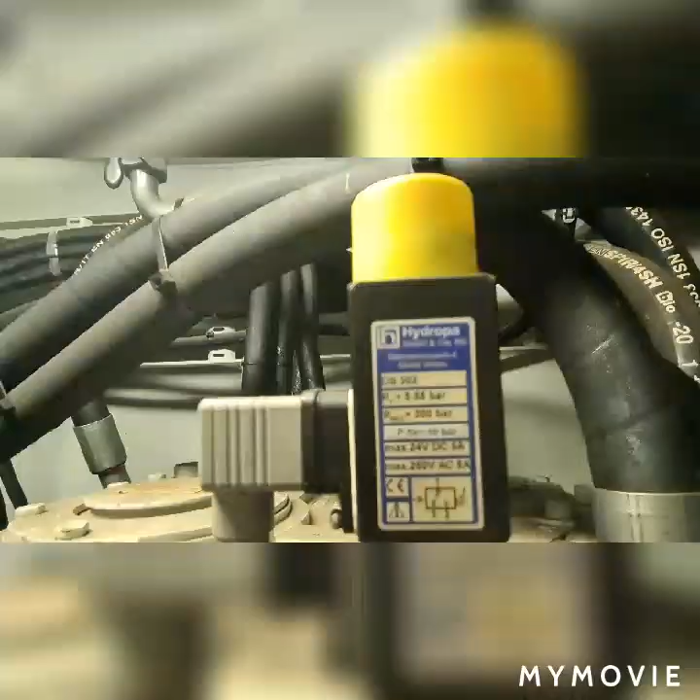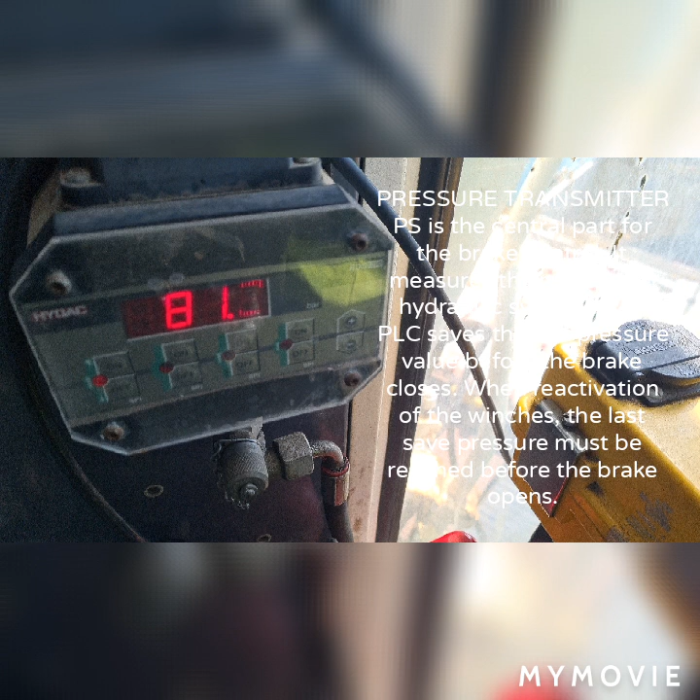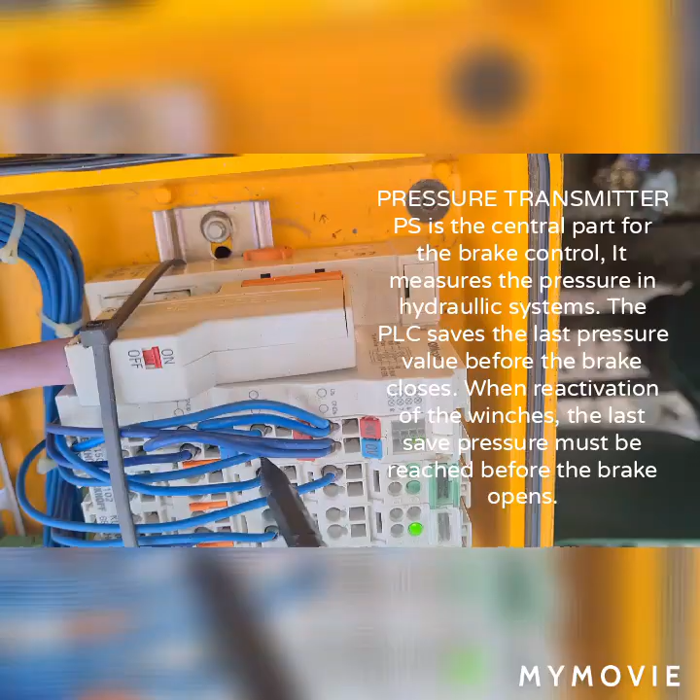Before doing any troubleshooting on crane failure, you need to familiarize yourself with the functionality of each component and part. We have the pressure transmitters, the central part of the brake control that measures the pressure of your hydraulic system. The PLC saves the last pressure value before the brake closes. When activating the winches, the last saved pressure must be reached before the brake opens again. So once the brake is closed, you cannot operate the crane at all.

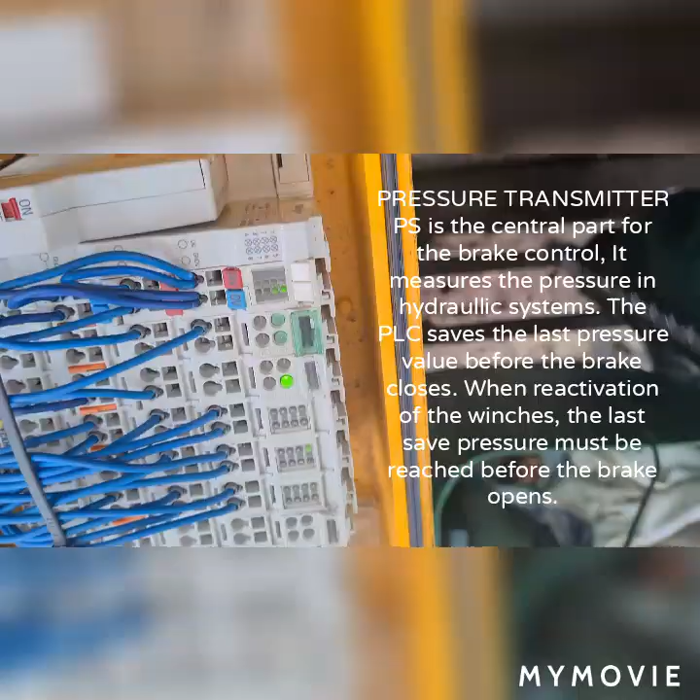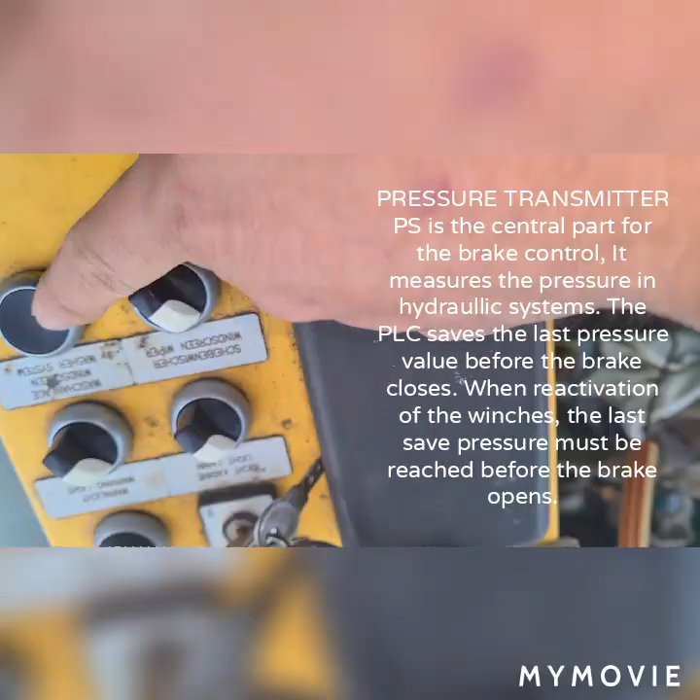To check, first I open this control lever with a joystick and check all the connections inside, tighten it, and do a certain check on it. As per check, the sound is activated and the overspeed lamp is activated. Once activated, the brake closes and you cannot run the crane at all.

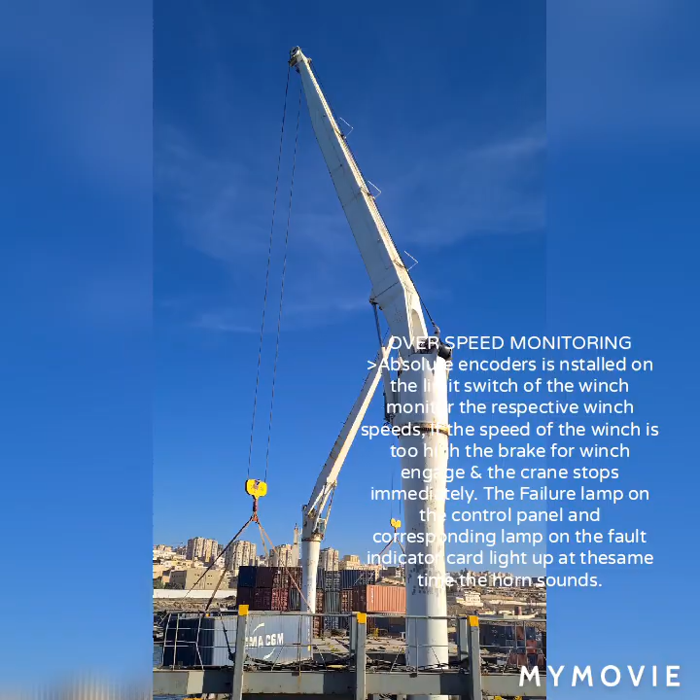You must take note that on top of the crane house there are rotary encoders installed and coupled on the hoisting winches. These rotary encoders continuously monitor the speed of your winches. Once the winches rotate and the PLC does not receive any signal from the encoders, a failure is triggered on the display with fault encoder number 14.

Take note, once this fault happens frequently, you need to check and inspect the encoders on top of your crane housing and do a replacement if necessary.

But before doing a replacement, you need to perform a proper calibration by zeroing the encoder's position. To do the calibration, put the jib at boom rest, then lower the hook by 1.5 meters, and inside the cabinet position the turnkey switch preset into the one position, then press the button preset hoisting gear for 2 seconds. After doing that, the zero-point calibration is accomplished.

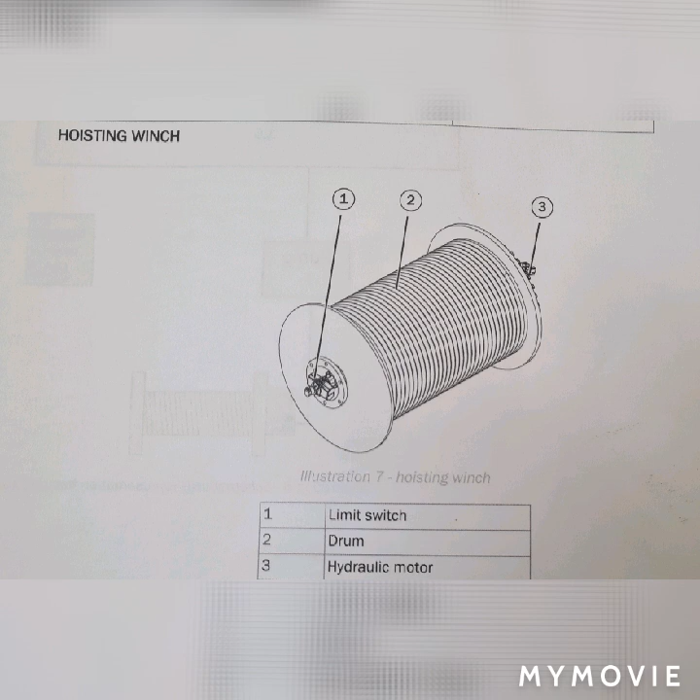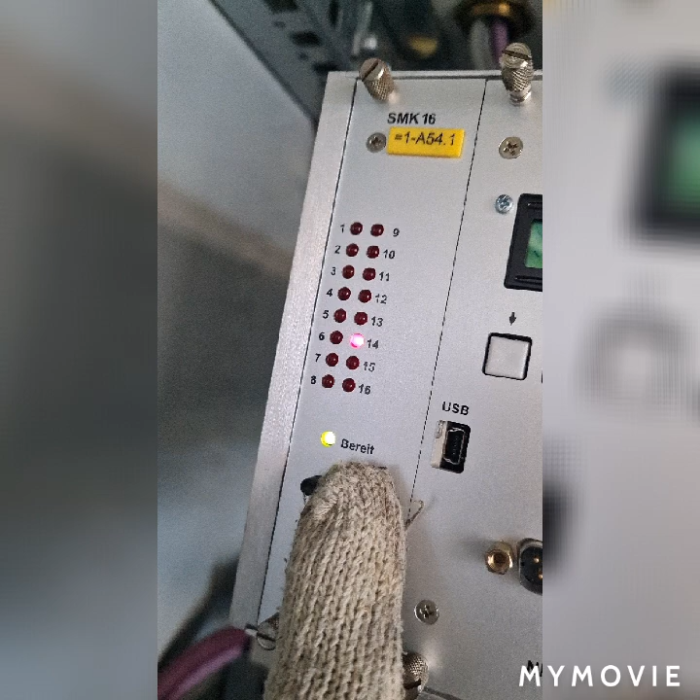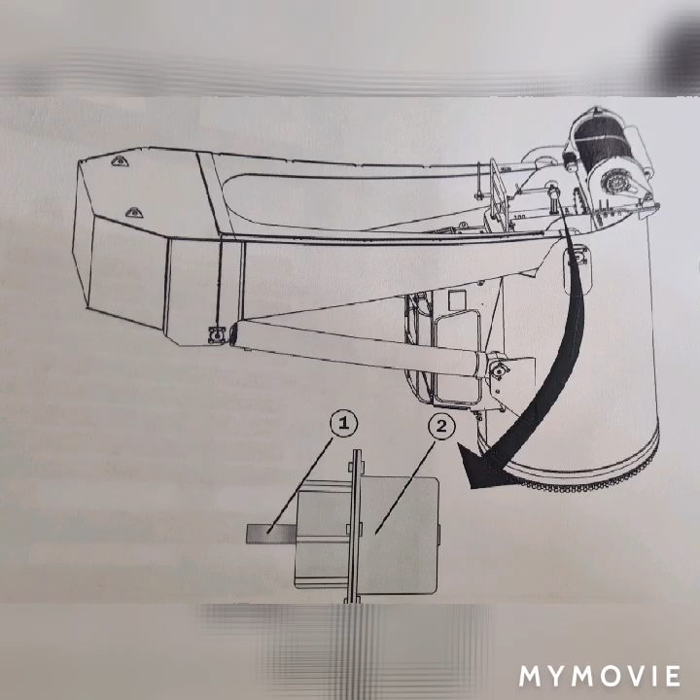So this is our drum winch from which the hoisting hook is installed together with the encoders, and this is the block, the ropes and the drum assembly. From there you will find that there is number 14 fault, meaning encoder faults, and there is a hoisting gear assembly with oil tank, pump unit and pumps. We have also a jib luffing limit switches which was installed with a lever, and there is also a slewing gear assembly with oil tank, pump unit.

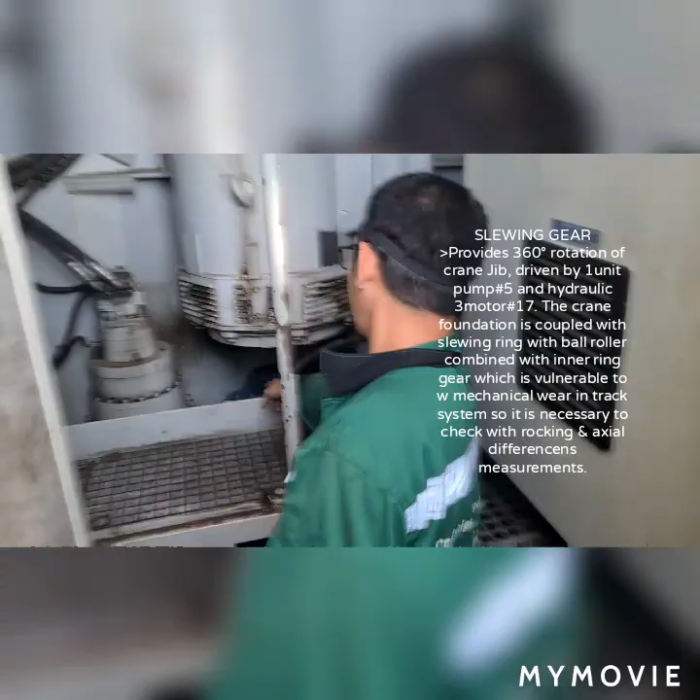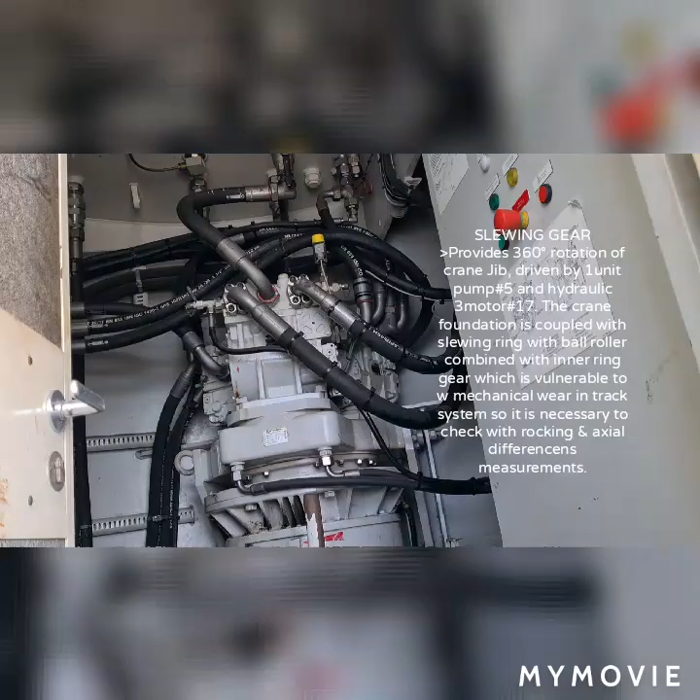Together with me is my chief engineer. Take note that the slewing gear is having a rotation of 360 degrees, meaning the jib will be able to rotate by 360 degrees, and this is installed with a bearing which was very vulnerable to mechanical wear, so you must need to do a check with a rocking test and axial difference measurement on it.

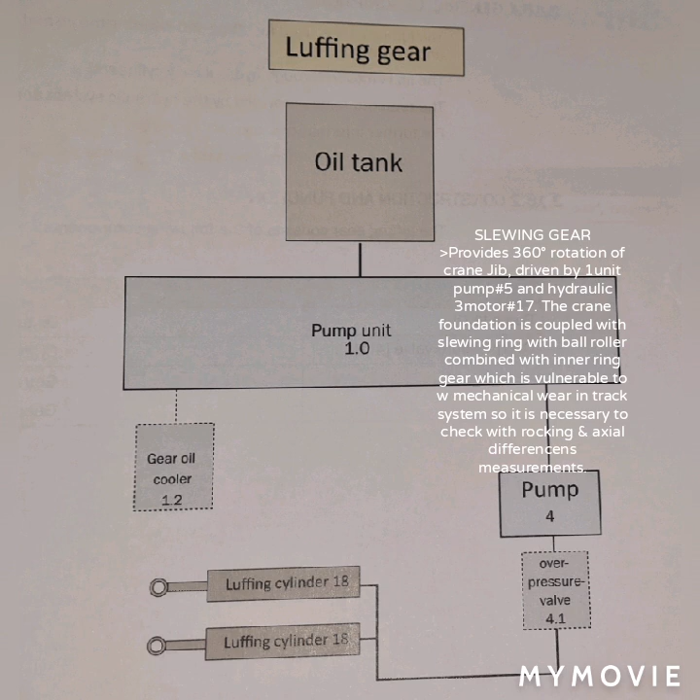Luffing gear is controlled and actuated by the 2 cylinders. Binibilan na natin yung hatch cover ng crane. Ayan guys.

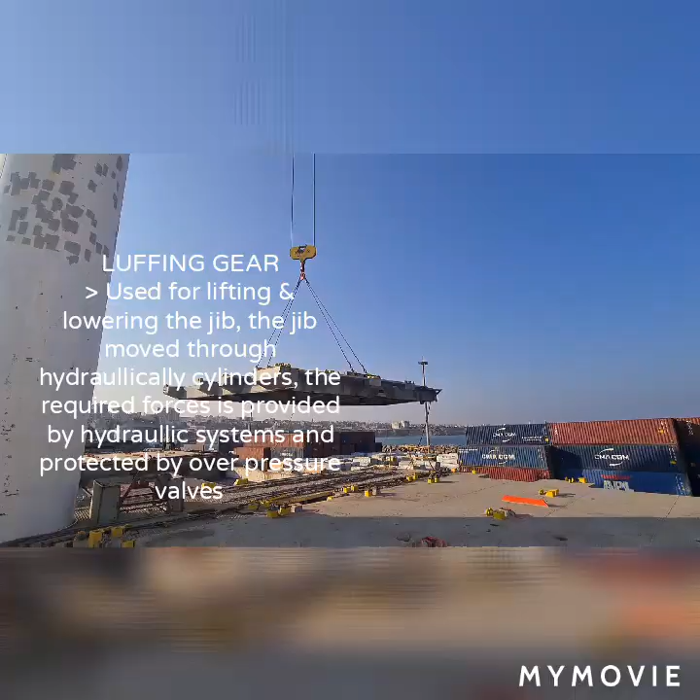Yan tayo, yan na, malapit na dito guys. Opposite direction tayo, tayo sa safe side. Doon o, yun o.

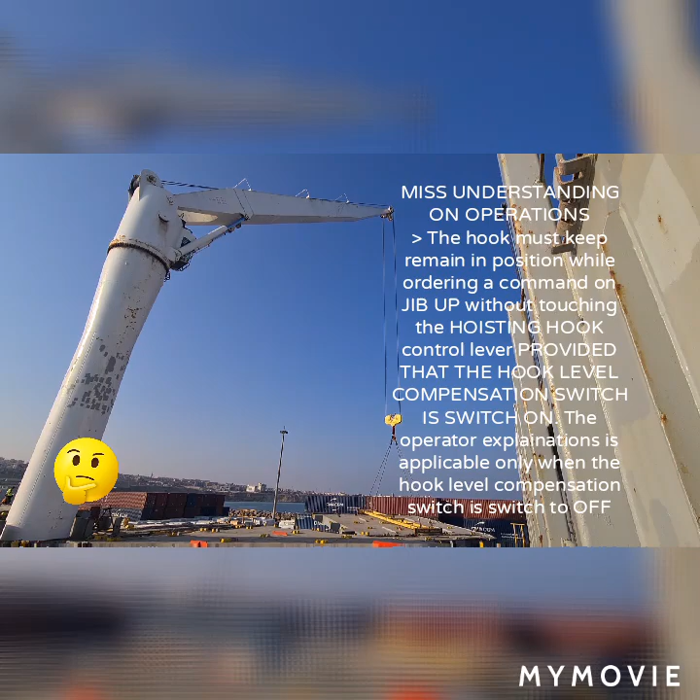Yan ang nangyayari sa kanya. Nagsuswing siya ngayon, swing. Then nakafix yung boom, nakafix din yung runner, yung hoisting down at saka hoisting up. Ngayon, ang tinatanong niya, bakit daw sumasabay ang runner sa pag-boom down at pag-boom up? So yan, binababa na niya yung runner, sumasabay din yung boom. Ayan ngayon, ibu-boom up ko yung jib, itataas ko. Dapat, yung hook na yan sasabayan sa pagtaas, hindi siya mag-o-auto slack.

Okay, sige, obserbahan ko rito. Yun, kaibigan ko, yung aming chief. Kaway-kaway! Yun, ino-obserbahan natin yung crane, paano siya gumana.

Ang ginagawa mo ngayon, binoboom down mo? Boom up yan, boom up. Kung ano, sasabay lang yung hook pataas, hindi siya mag-o-auto slack. Oo, si Boss. Bali, binoboom up mo yan, tapos yung hook nag-i-slack, ganon? Oh, Roger, ganyan ang nangyayari ngayon.

Sa ibang barko, yung mga design ng crane nila, ganyan ang settings. Dito kasi nung dinatnan ko, iba eh. Pag tinaas mo, tataas din yung hook, hindi siya mag-i-slack ng hook.

Ayan, obserbahan mo nga, nag-boom up ka, tapos kung saan nag-i-slack, no? Oh, Roger, eto tapos ito, boom down ko konti ah. Ayun ang problema daw, pag nag-boom down, ayan, boom down ko, tumataas naman siya. Mag-i-boom down na yung ano.

So it is confirmed that the explanation of the crane operators is valid only if the hook level switch is in off position. On this condition, why the hook keep remain on the position while the jib up order command is made, because the switch for the hook level compensation is in on position.

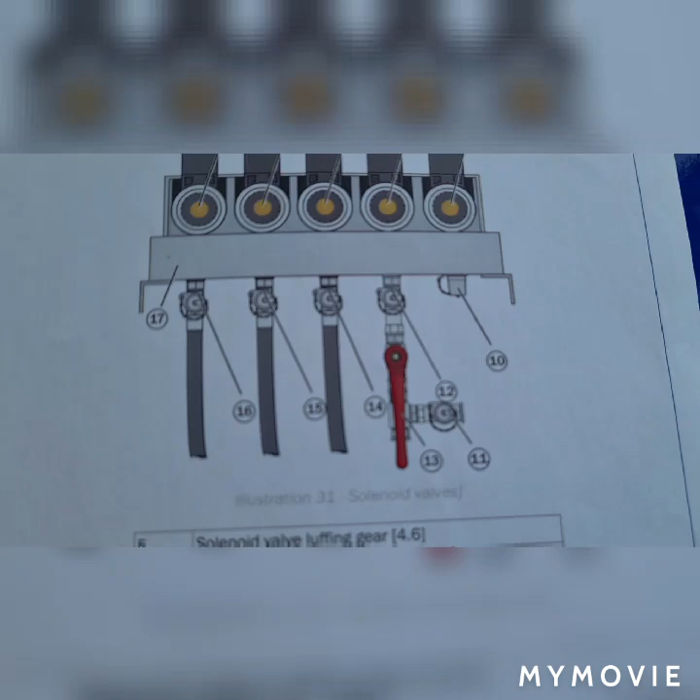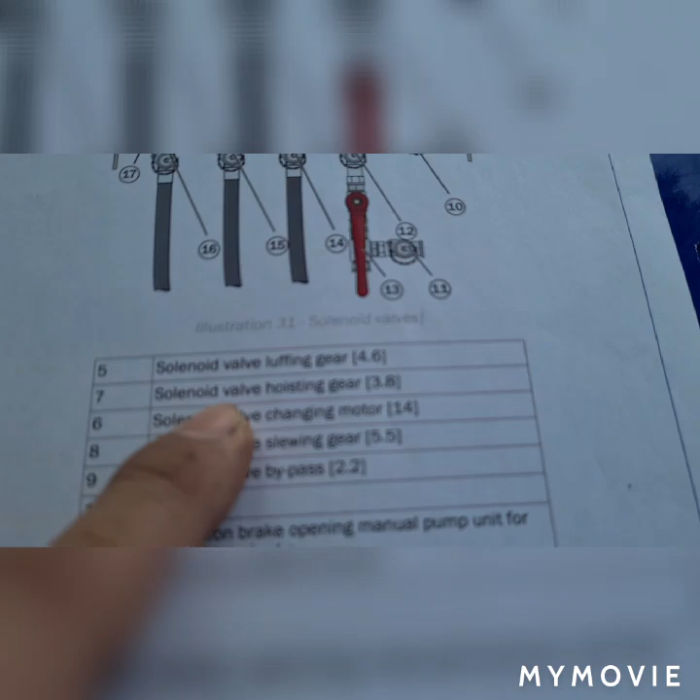So to do a further check, guys, there is a solenoid valve here. This solenoid valve is responsible for the luffing gear, for the hoisting gear, for the changing of the motors, and also solenoid valve for bypass.

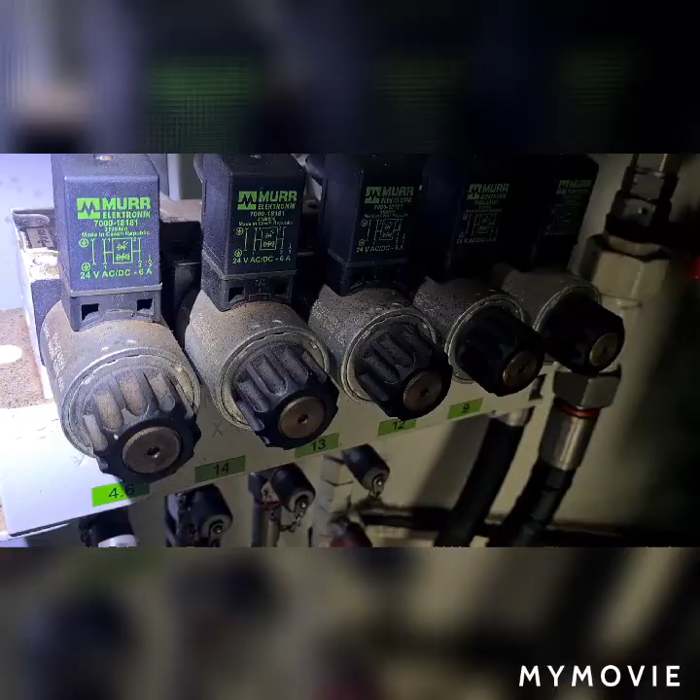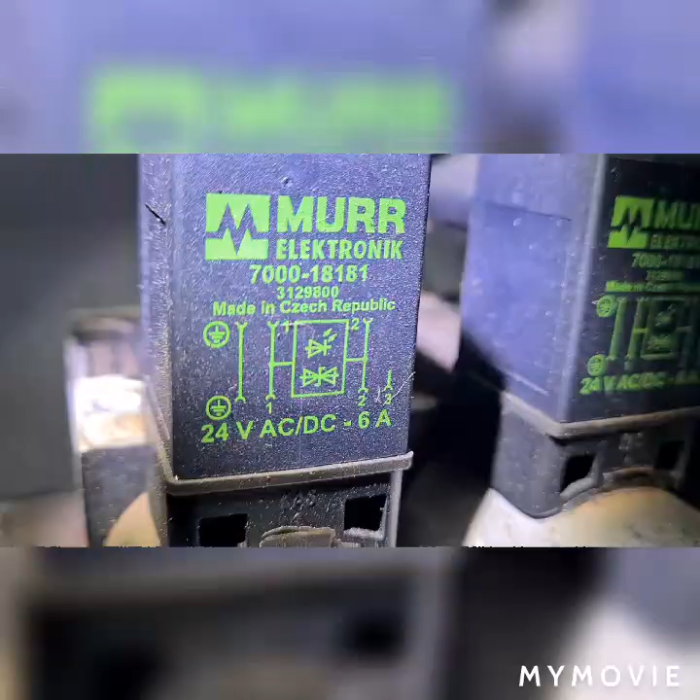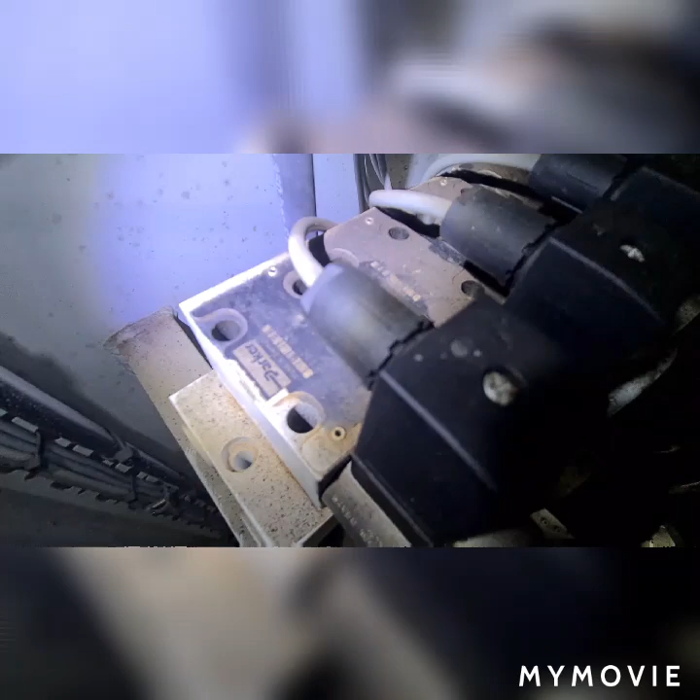So everything that you do order command on the control lever, this lever gives electric power on this solenoid valve. Once this solenoid valve is actuated or energized, it distributes the oil on the motors, hydraulically operated motors, and gives a certain action or execution on every command that you order or want to perform while controlling the operation of the crane.

This solenoid valve also needs to be checked, so any fault or failure of crane operation will be minimized or avoided.

The crane also has a built-in brake unit, stopping brake open after starting function, stopping brake close if the function is closed, if the control lever is in zero position for more than 3 seconds, or immediately after a failure occurs, immediately after the crane is switched off.

So this crane is very safe because it has stopping brakes that will trigger during crane malfunctions, crane overpressures, crane hoisting overspeed. Overspeed is activated with the help of the sensors interfacing in a programmable logic controller.

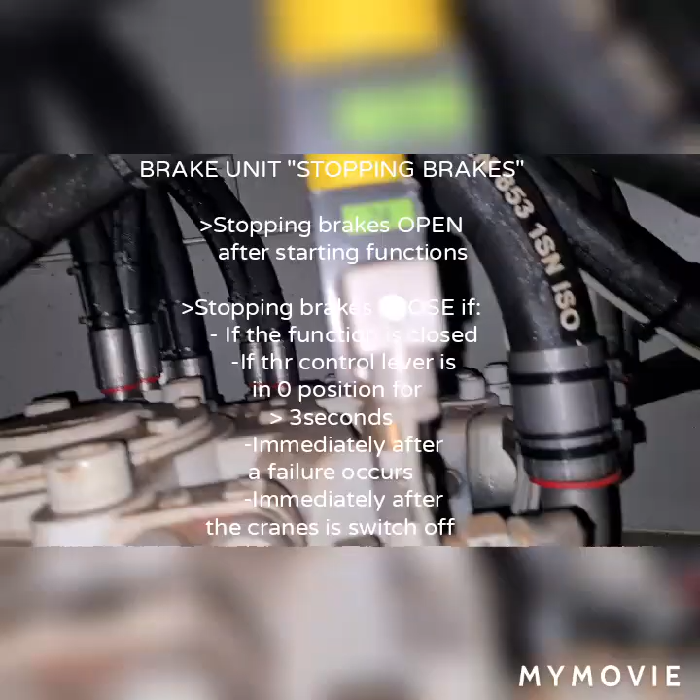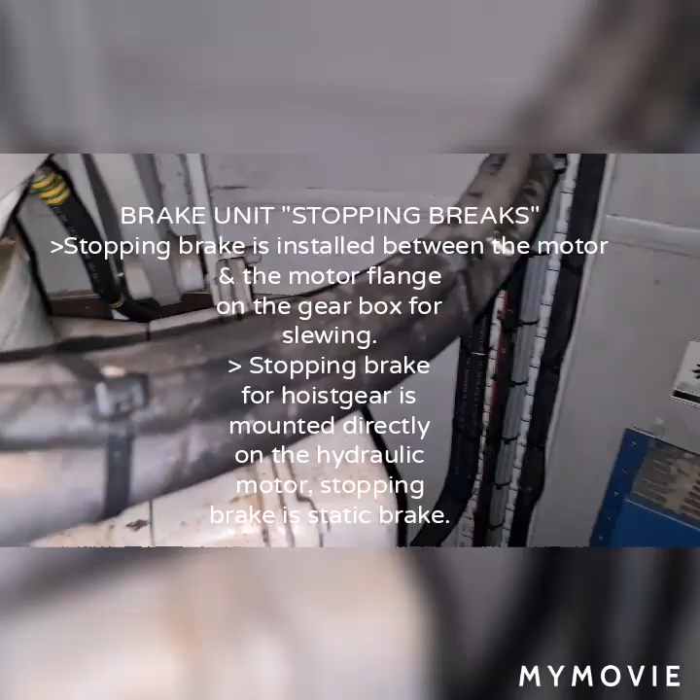As you can see on the main pump, there is a pressure switch that monitors the hoisting pressures that will activate the brakes and stop the crane from moving when there is an overpressure on it or a sudden pressure drop. These are the pressure switches that monitor all hydraulic pressures flowing in my hydraulic hoses.

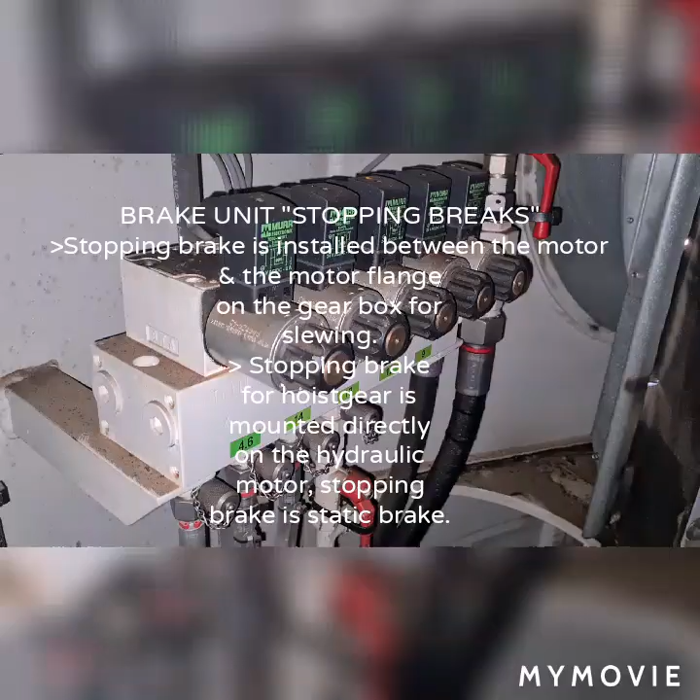So this crane is very safe because it has a safety function that will be able to switch off or cut off the crane operation during a critical situation.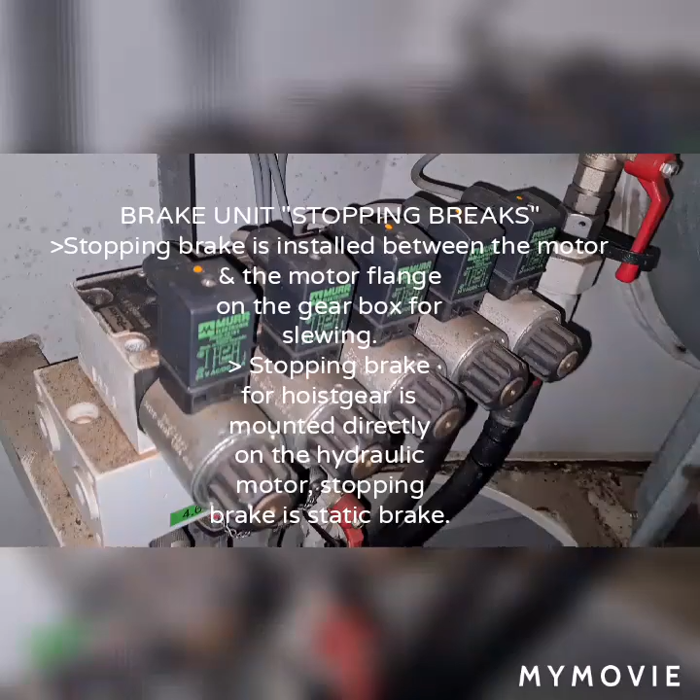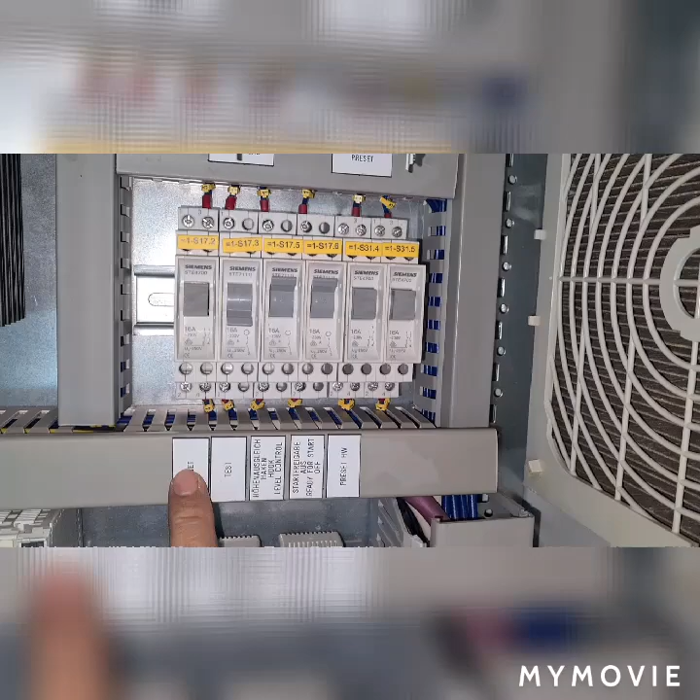And here is the preset key. You must need to position it into 1, and you must need to press also the preset hoisting gear within 2 seconds to perform a zeroing calibration of your encoders. Note, any malfunction on the crane or failure, you must need to press the reset button for you to operate the crane again, provided that you already corrected some failure that you may encounter on it.

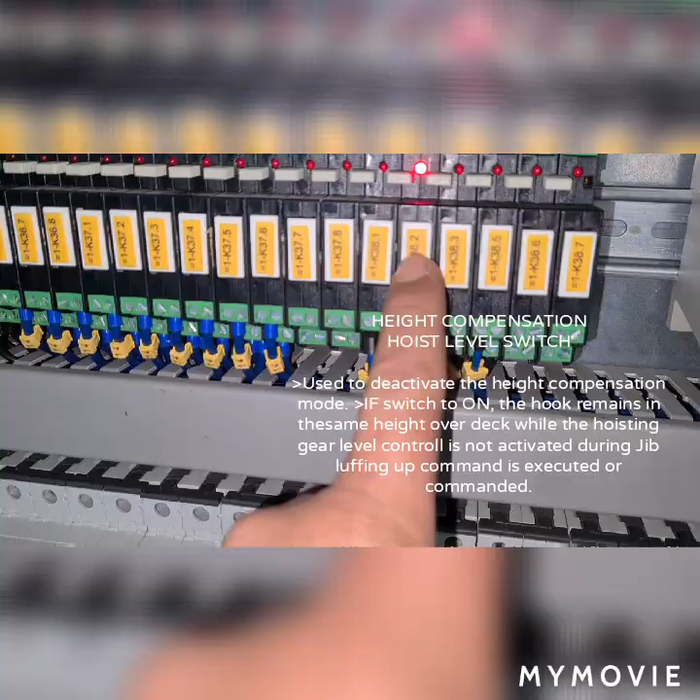Keep in mind that this height compensation switch must need to be switched off if you want to do jib up command without keeping the hook remain on its original position. I asked Bosun to operate the crane and observe the hook responses while doing a jib up order command.

Okay. Hook now. Up, pointing down. Dapat mo nga nandun sa ano? Nandun sa dapat malaki, sa container.

Say, no? Test load, preset. Ngayon, dito, meron tayo rito reset test hook level control. Ready control kapag naka-activate, yun nangyayari. Habang binuboom up, umaarya yung hook kapag naka-on to.

Ngayon, subukan natin itong i-off. Paano rin ni Maestro. Sige, Tro, pasok. Pwede pang i-request, dali ah. May nag-click, ayun, power request. Power request ako, yung power request. Sige, okay, start ko, okay start.

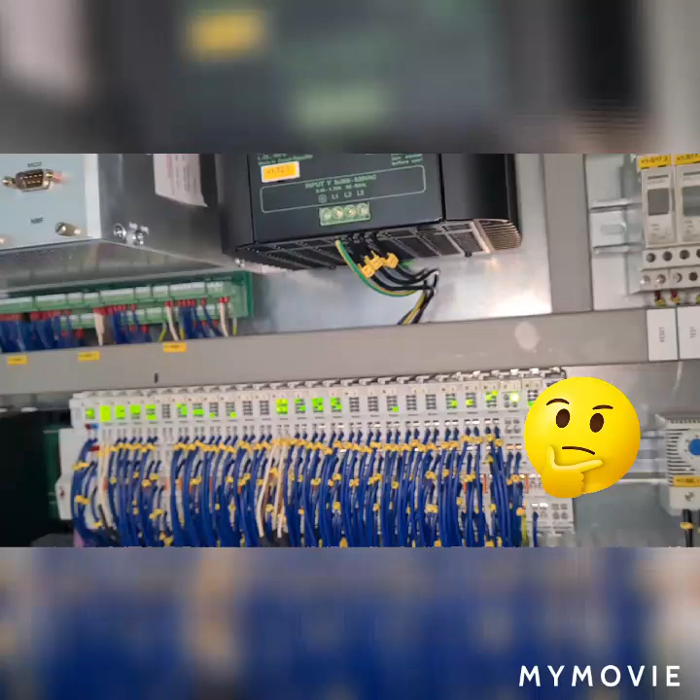Pag nag-boom up, okay. Hook now. Up, pointing down. Dapat mo nga nandun sa ano? Nandun sa dapat mo laki, sa container.

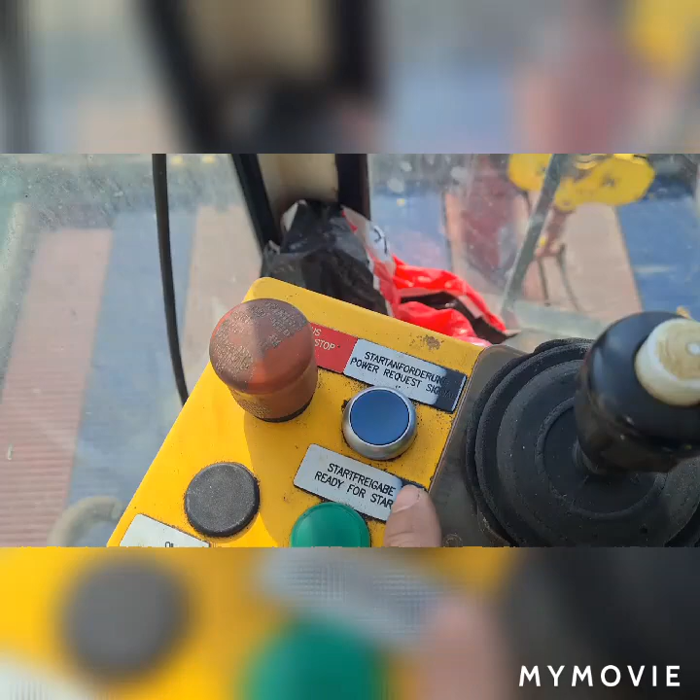You must press this power request. Engine room, power request. Okay, ready for start.